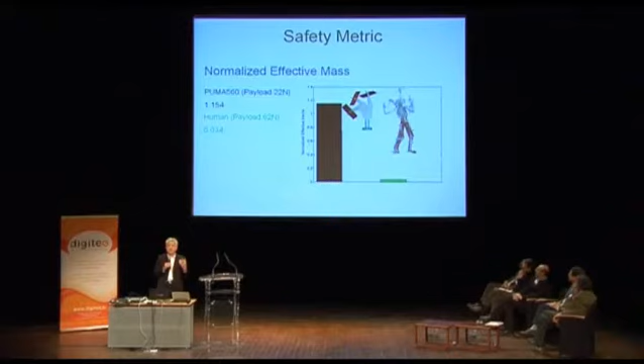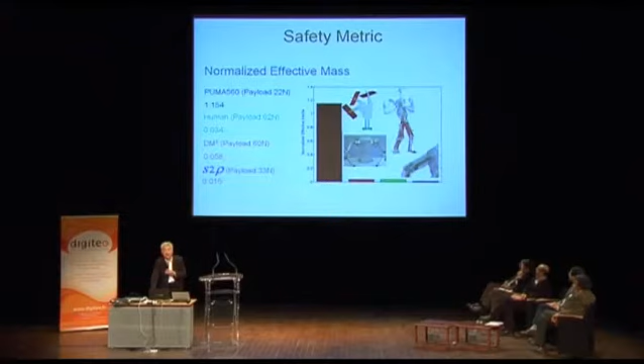Over the past years, researchers around the world have looked at new concepts for designing robots that reduce those numbers so robots can be safe to interact with humans. I'll have the chance later to mention what we are doing at Stanford in that area.

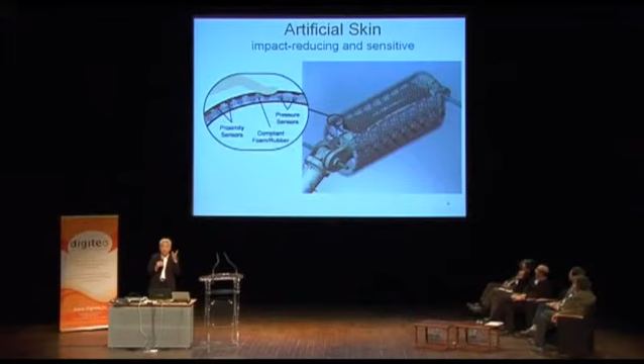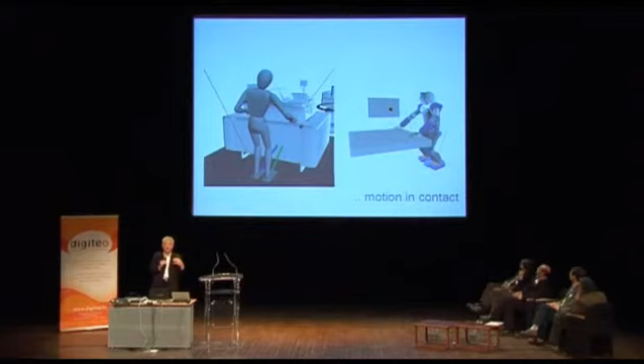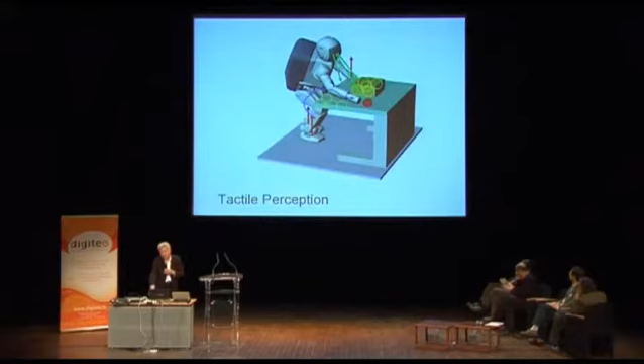Do we have skin on those robots? Are we able to sense and determine the direction and contact point? Do we have robots capable not only of walking—we've seen humanoid robots going upstairs and moving—but are they able to interact with the world, to make contact with the world without falling? These challenges bring new problems in perception: we need to perceive not only free space but also contact. We need tactile feedback, and we need to deal with the mechanism in terms of performance and safety.

We need to deal with perception and sensing for unstructured worlds, with planning and control, with skills for the human, and with human-robot interaction. There are a lot of fun, interesting problems that bring together interactivity and human-friendly robotics in these applications.

I'm going to talk a little about some of these issues in the remaining time, but safety is really critical—unless we deal with it, we won't be able to deploy these robots. Safety has been dealt with by separating the workspaces of the robot from the human. Now we are saying we want to bring these robots into the human environment, so safety is critical. Performance is also critical, and the two are always competing. How can we deal with this problem?

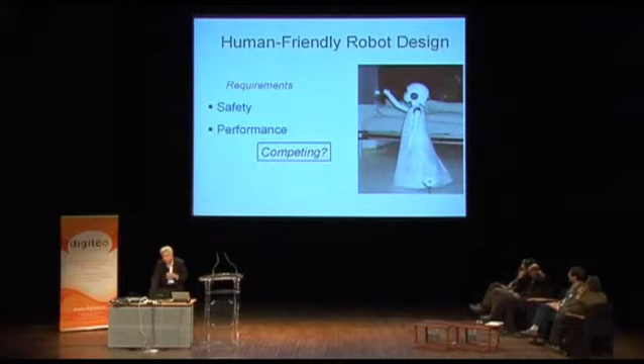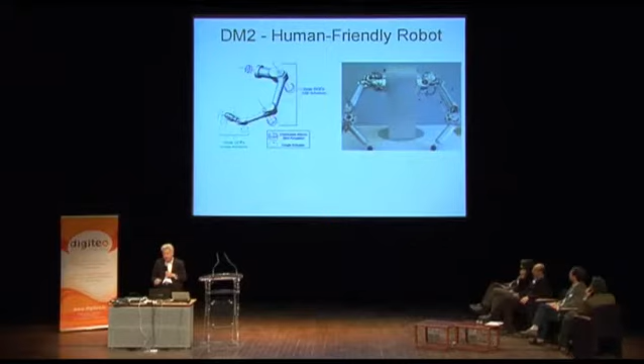We designed a new robot that breaks the concept of one motor per joint. We broke the motors through a frequency requirement and showed it's possible, through macro-mini actuation, to build mechanisms that are safe. This is an example of a new concept: hybrid muscle-like actuation on bones together with electrical motors and skin all around the arm, to build an arm that is completely safe for interaction with humans. We are currently building the skin and developing the sensors together with the actuation.

On the control aspects, we have challenges from combining mobility with manipulation. These are some early developments: Romeo and Juliet were two robots we built at Stanford almost in the early 90s, and those robots brought a number of capabilities in combining mobility and manipulation.

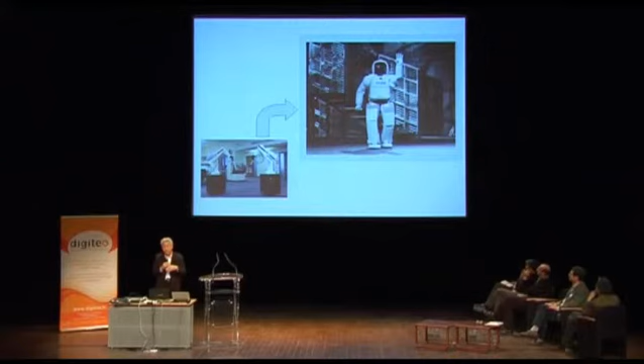By the end of the 90s, Honda brought a robot that all of you have seen, and we were asked to bring the interaction capabilities of Romeo and Juliet to robots like this one. That's not easy, because we're now talking about multiple robots with new structures, many more degrees of freedom, and many more difficulties in control and interaction.

We need to deal with a clear problem: a task, which involves contact and motion. As we do these motions while in contact, we need to deal with constraints—internal and external obstacles. But even then you still have more freedom: the posture of the robot, which has to be consistent with everything we've listed, consistent with the task and the constraints.

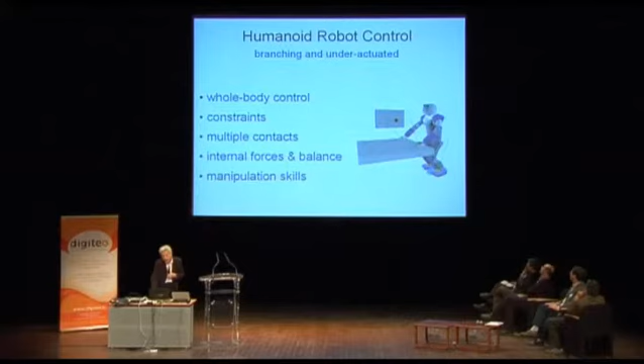That brings about a controller requiring whole body control, but also dealing with the constraints, the contact, and the skills of the robot. This is something we would like to also be skill-like, human-like skills.

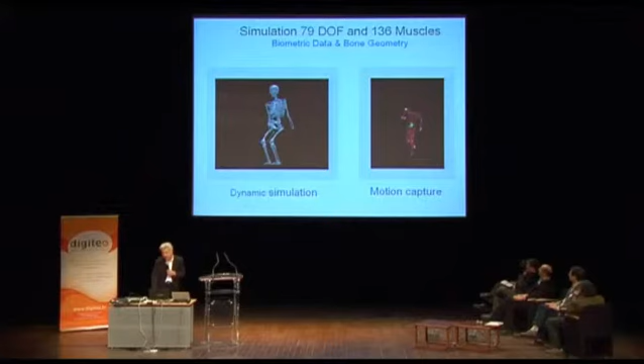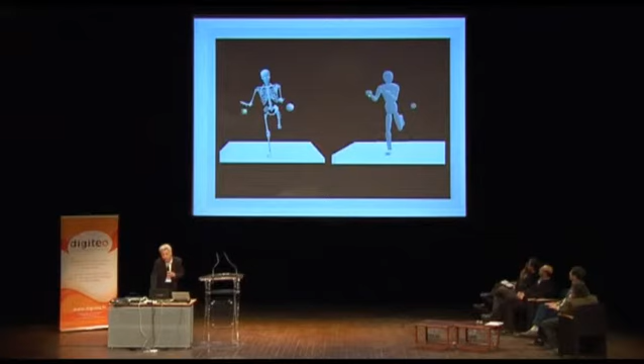So we started learning from the human, analyzing human motion, and applying techniques from robotics to the analysis of humans. What you discover is that much of the science we develop in robotics is not only good for robots, it's good for articulated body systems. Many of the algorithms are useful in other domains, modeling the human to understand robots and capture the way humans move so we can map it to the robot, but we were able to apply it to both the robot and the human.

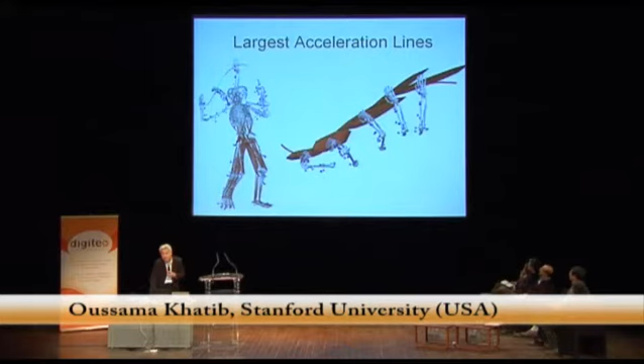Now we have models that can analyze athletes that are moving, capture their motion, analyze it, and map their characteristics. Then we can close the whole loop from motion capture in real time, analyze the characteristics, and do feedback to the human to make corrections.

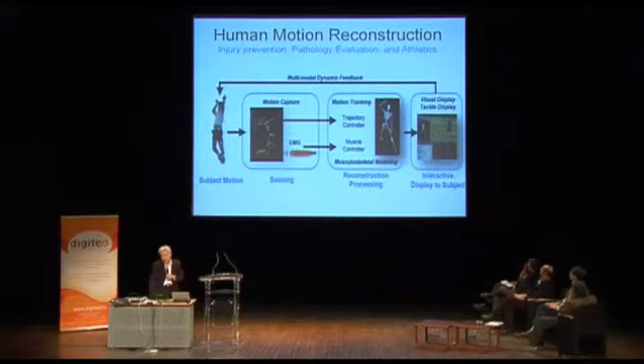Skills bring us to the interaction, and the interaction brings us to the haptic interaction essential to produce those motions. I have only two hands, and I'm going to try to show you a haptic on my laptop. Here is a simulation of the haptic without the haptic device.

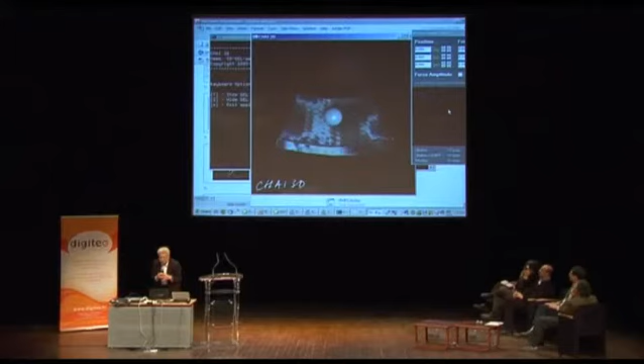I'm going to operate this gel by moving this object, and you can see the forces on the right, but you can also see the interaction with a flexible environment, which is very difficult to do, and this is running actually on the laptop.

Once we have that feedback, we can go and touch a physical environment through another robot. The haptic device is driving the virtual robot and driving the model, and then driving the real robot. And then we reconstruct what the robot is sensing.

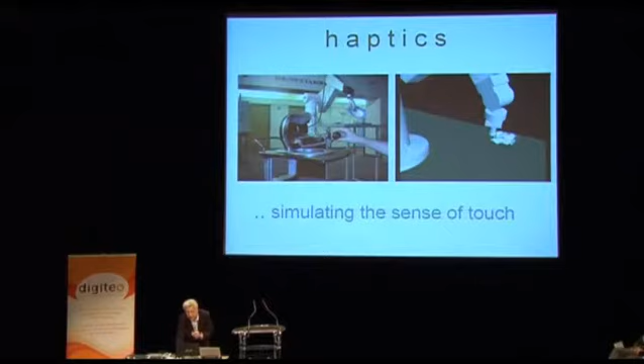We are at the same time dealing with the constraints of detecting collisions and resolving them. When we have these collisions, we need to dynamically resolve them, and here we see how we are doing this in real time. We are resolving thousands and thousands of collisions in real time, which can be used to analyze crashes. For instance, test crashes could be done in the computer.

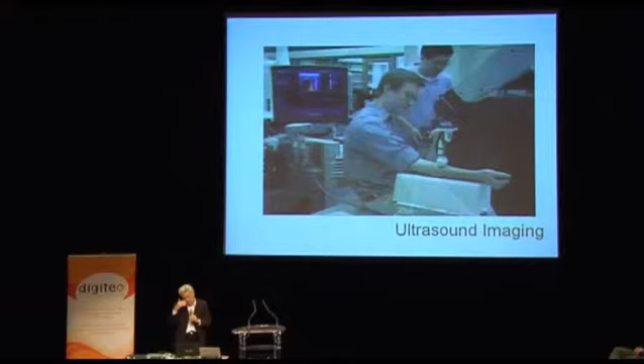Or if we are using the haptic to interact with humans, we can do all kinds of things. Like in this project, we are looking at ultrasound imaging of pregnant women, where we are getting the images and reconstructing them, replacing, in fact, assisting the sonographer, who usually suffers a lot from the pressure of these measurements. So here we are doing it on the hand or arm of one subject, and then we do it on a virtual womb.

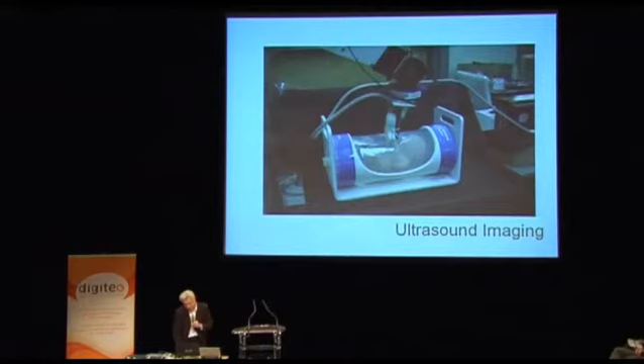So we are scanning now the baby, and what is happening is we are getting the 3D image reconstruction of that environment. This is what the ultrasound imaging is producing, and step by step we build the whole model, and now we can examine this model.

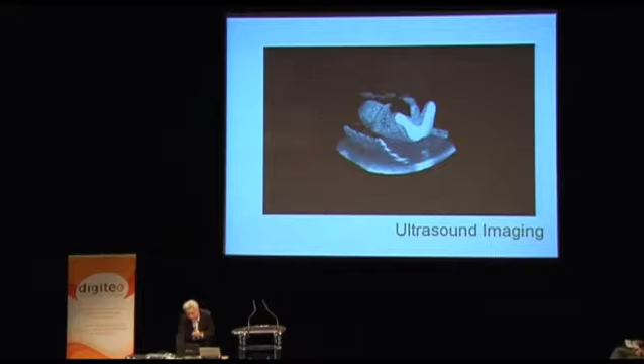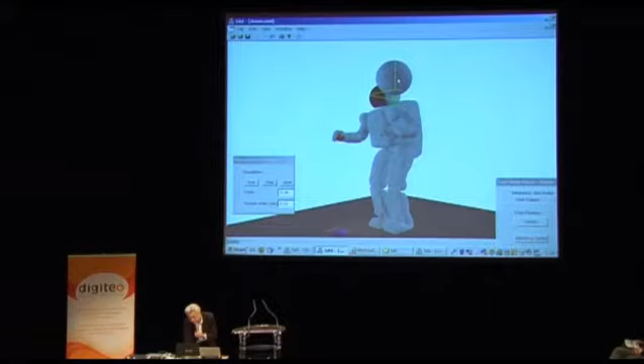And in fact, all of this cannot be done without dealing with all the constraints. Let me just show you how we deal with constraints. For instance, we have this robot here, and if there is an obstacle, we need to take that obstacle into account. So you can see how the robot is moving away from this obstacle while maintaining the task. This is critical to be done in real time in order to achieve the capabilities of interactivity that we are talking about.

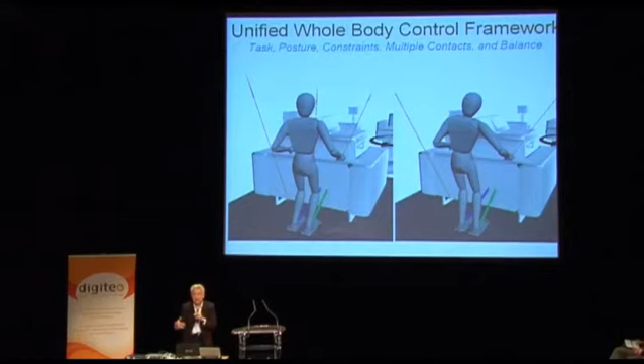So once we have those problems resolved, we still need to add, in addition to the constraints, the balance and the multi-contact. So how we control those multi-contacts, they are also treated in the same way.

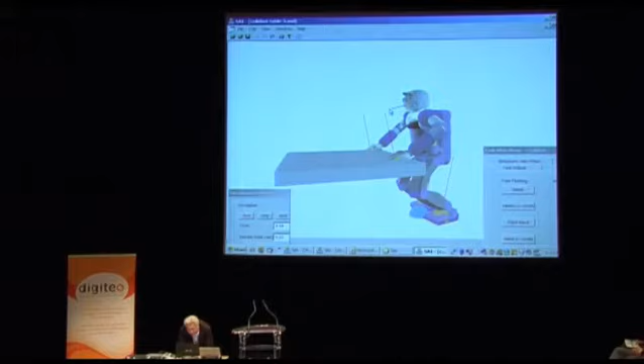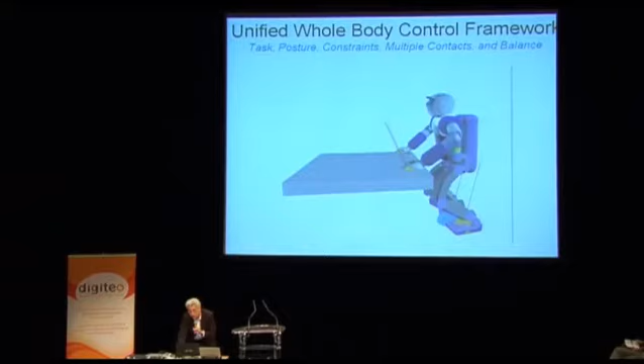And again, I can show you here how we can do that with the simulator. Here the robot is currently balancing between all these contacts, but if we pull on the robot's head, you can see how immediately there is adjustment of all the points to recompute the reaction forces and distribute them at all these locations. This is very important if we want to be able to do those interactions in real time.

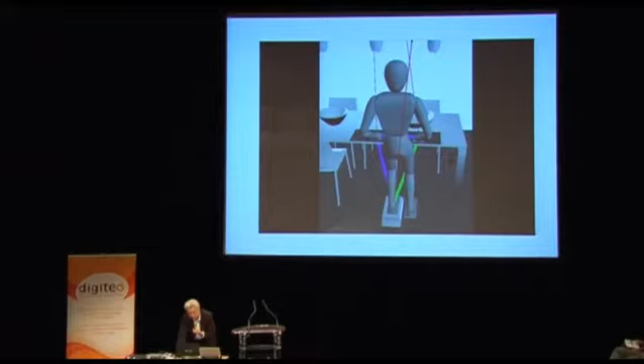And once we have them working, everything is going to be working well. But if you do not measure contact forces correctly or make any mistake, the robot immediately will break the contact and produce instabilities. This was implemented on Asimo.

Actually, we have one Asimo at Stanford, and you can see here Asimo performing motions, while in fact we are moving the table and putting different objects in front of Asimo.

I'm not going to run the video, but this work is part of a bigger picture of how we build architectures for computer systems that integrate artificial intelligence together with controllers by building a unified framework for whole body control.

And here we can see an example of a very complex behavior that is all implemented through just a unified vector that is sent to the controller.

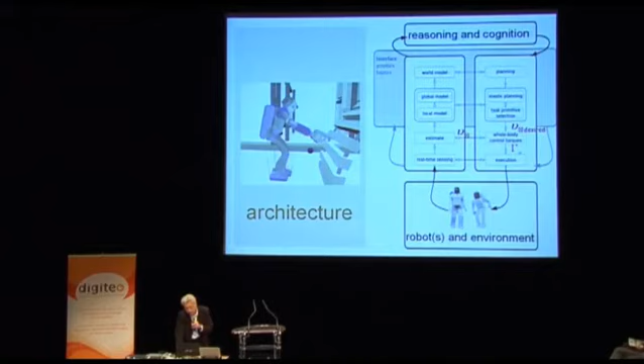As you know, in the Bay Area in California, the housing is very expensive, so we bought a virtual apartment for our robot, where we are exploring in the virtual world a lot of skills and developing those skills, and then implementing them on the robot.